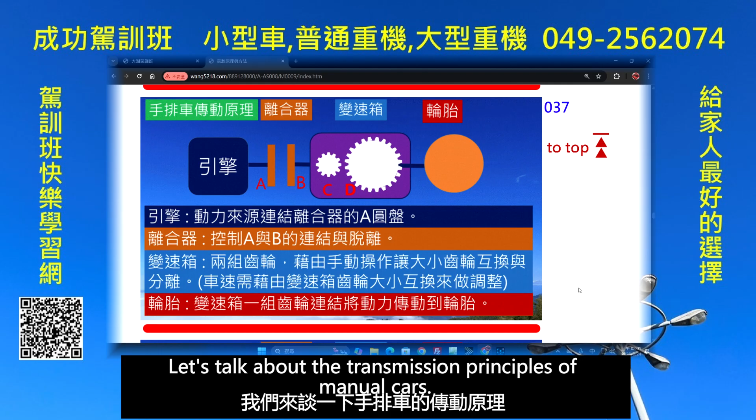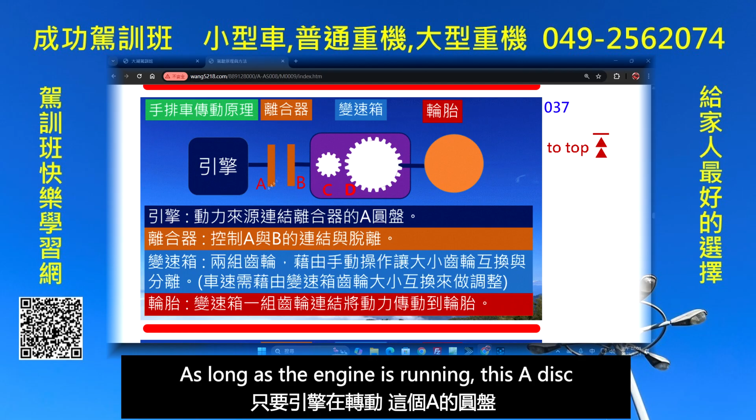Let's talk about the transmission principles of manual cars. Here we're discussing the engine. The power source connects to the A plate of the clutch. In other words, we see the engine. The clutch consists of two discs. One disc is connected to the engine. As long as the engine is running, this A disc is rotating.

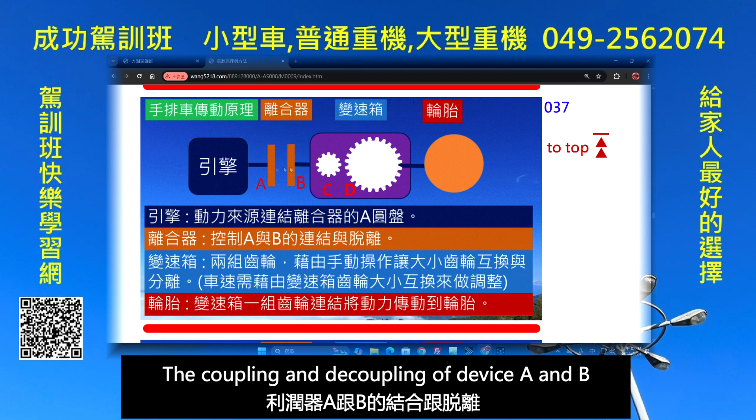The clutch part controls the connection and disconnection of A and B, the coupling and decoupling of device A and B. When we press down on the clutch, A and B separate and power isn't transmitted over. If you release the clutch, A and B connect, transferring power to C here.

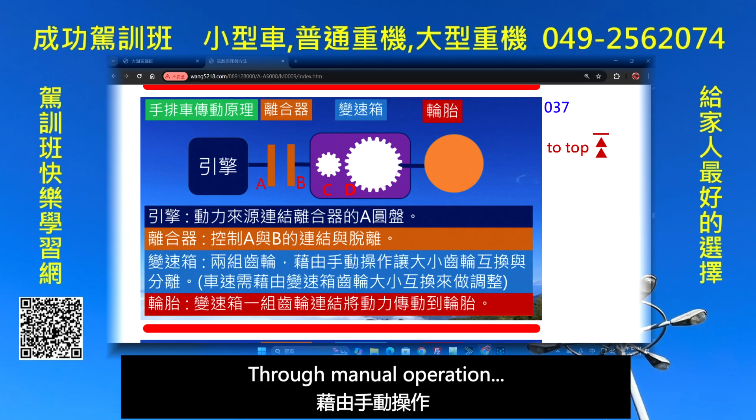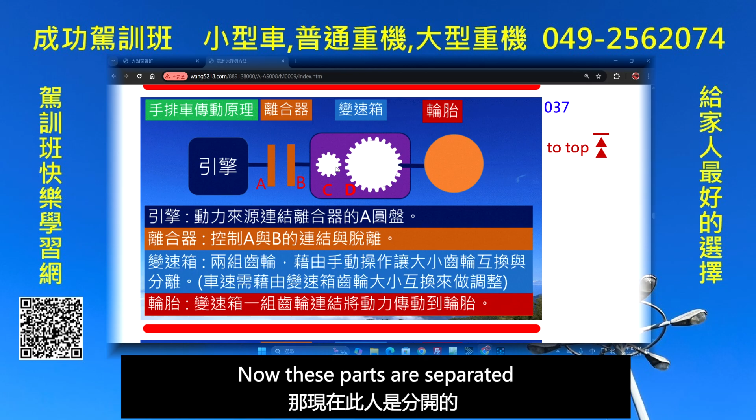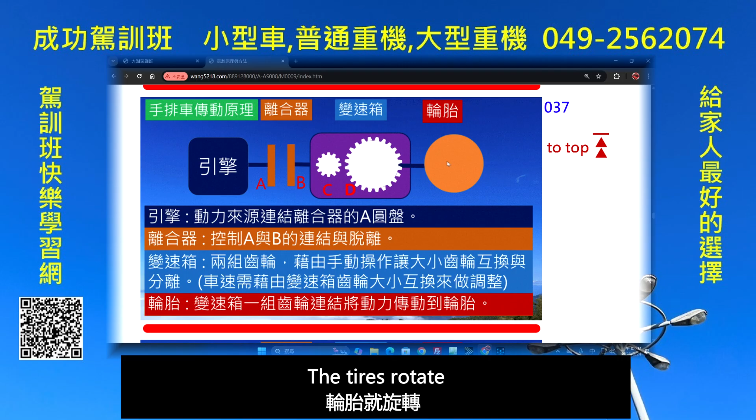First, let's understand their interaction. When we press the clutch, A and B separate. Engine, I'll start it again. Power only transfers to A here. It doesn't transfer over because it's the second device that is separated.

Second, releasing the clutch. When we release the clutch, A and B connect together, therefore power is transmitted to C, then C rotates. Think about it, everyone. At this moment, it's in neutral. Can C and D connect? It's impossible for one to be spinning while the other isn't. They can't combine. So what action do we need to take?

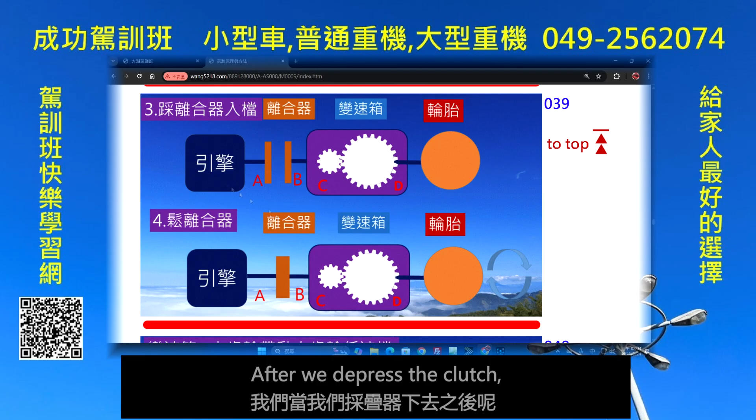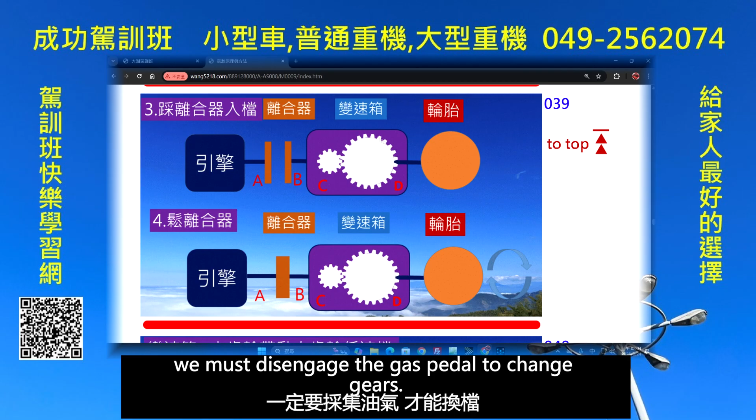That's correct, but our vehicle has weight. With the weight of the vehicle, if you want to move it quickly, it requires a lot of energy. But that's not possible. Therefore, we need to gradually release the clutch for this reason. If you release the clutch too quickly, it will stall, because suddenly the vehicle isn't moving. Hence, it stalls.

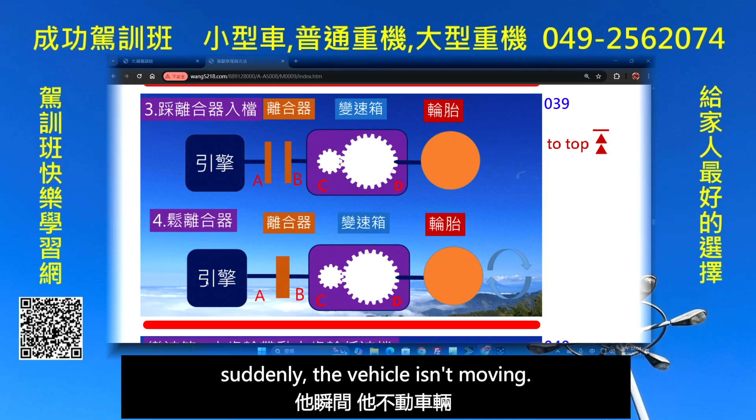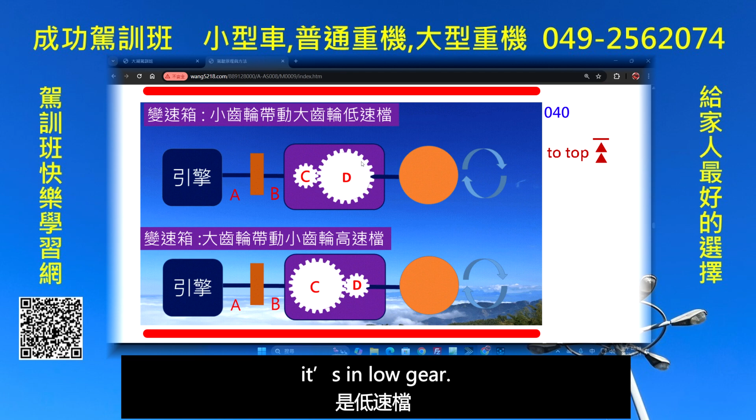Now let's look at the gearbox. The gearbox operates with the gears swapping. If we shift from small to large gear, it's in low gear. If it's large gear combined with small gear, it's high speed, because it goes faster, right? This mechanism is identical to that of a bicycle. The reverse gear is just a gear in between. With an added gear, it changes direction.

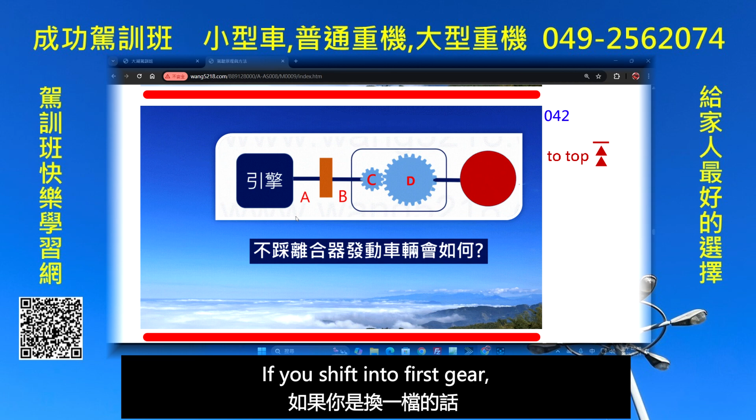Next, let's observe. What happens if you don't press the clutch? If we release the clutch, the engine isn't running, and it's still in gear. So when we start it, the vehicle will lurch forward. If you shift into first gear, it'll lurch forward. If you shift into reverse, it'll roll backward. Therefore, in a manual car, when starting, you must press the clutch, press the brakes, and ensure it's in neutral to avoid the car suddenly lunging.

So what if a manual car won't start? When there's no battery power, we can push it. Because think about it, to start, you can push the car. In other words, when we push the car, we can also start the car. But how do we start it? Shift into low gear, press the clutch. Don't press the brake, release the brake lock, push from behind. Once the car has a bit of speed, you can then let go. Releasing the clutch engages the engine to start.

In an automatic car, you can't do that, because the transmission system of an automatic car operates differently. Manual cars require pedal operation.

In this diagram, we have 1, 2, 3. Someone asked a question. Let's explain what 1, 2, and 3 signify. First, let's watch a clip.

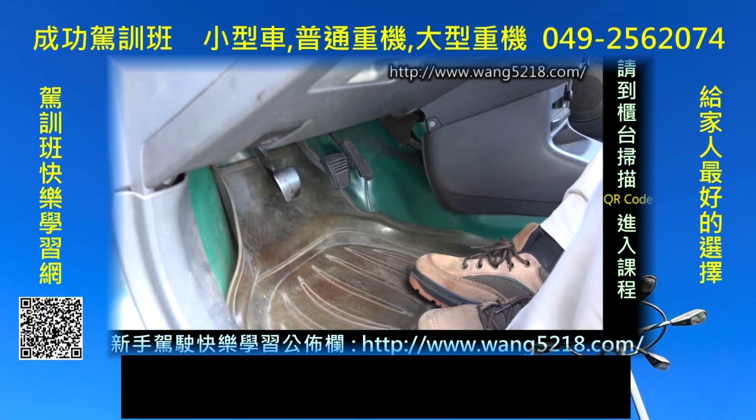Hello, everyone. This is a manual car. A manual car has 3 pedals. The rightmost is the accelerator. The middle one is the brake, and we control the accelerator and brakes with our right foot. You absolutely cannot use your left foot for the brake. It's only the right foot that operates the accelerator and brake. Okay, let's pay attention to how our foot is positioned. The foot should be on the ground. The point of contact is under our toes. Don't step like this, it's harder to control. It's just not right, this way your foot is suspended. If you can't press properly, the same goes for the accelerator. Use your toes down on the pedal. When braking, you must press lightly.

Next we introduce the clutch pedal. It's the pedal farthest to the left. When pressing it, go all the way down. When releasing, do so slowly. When starting, release slowly - each car's clutch has its own friction point, meaning the point when it starts to move the car. That point differs: some start moving with just a little release, others need to be released higher, even more so for some. This is due to different levels of clutch wear, which affects the characteristic of each car. Therefore, when releasing the clutch, the friction point varies. So sometimes when students change cars, for instance driving car A today and car B tomorrow, they find it hard to drive.

This is our handbrake section. Right now, the handbrake is in the engaged position. The handbrake is responsible for the 2 rear wheels, controlling them. For manual cars, before stopping, you must shift to neutral and engage the handbrake, then shift into first gear. Why first gear? That's the second safety measure - if in gear, the car won't move. So that's 2 safety measures, 2 safeguards. Therefore, starting a manual car requires you to press the clutch and press the brake.

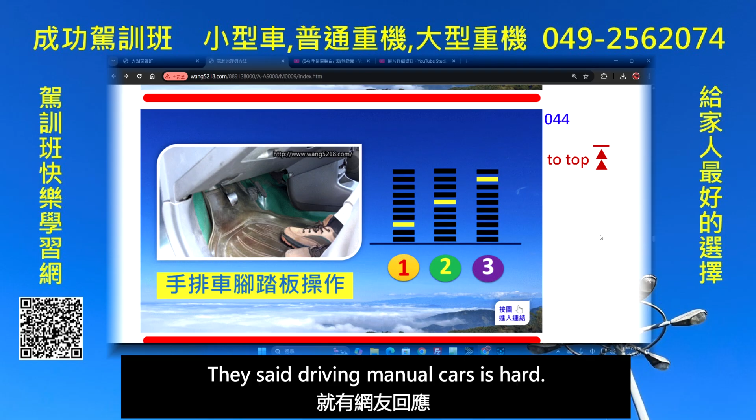This video was posted online, and some users responded saying driving manual cars is hard - they keep stalling. But manual cars are actually easy to drive and don't stall easily. Why is that? Let's analyze it.

We divide the clutch travel into 10 equal parts. The car in the driving school is car #1 - its usage is not high and the wear is also minimal. This means when you release from the start to the 3rd notch, it already starts moving the car. Let's assume another car is #2 - it needs to be released to the 6th point to start moving. So we're used to releasing quickly from 1 to 5, releasing faster in this range.

Then it stops here - release slowly. Switching to car #1, you might suddenly release to the 5th notch, jumping ahead. That leads to stalling because you jump to the 6th point - it stalls because you're releasing too fast. This teaches students something important.

The clutch in every car differs - the clutch height is not the same. What is height? It's the friction point. For example, when you release to the 3rd notch, it will pull you forward. For car #2, it must be released to the 6th point before moving, which means pulling it almost to the limit - it has to be higher because the frequency of usage differs for each car, so the wear levels differ, and hence the height will be different.

However, it can be adjusted, but once adjusted to a certain extent, it cannot be changed anymore. So when driving a manual, the first thing is to understand what clutch friction is - not every car is the same. This is something I want to remind everyone.

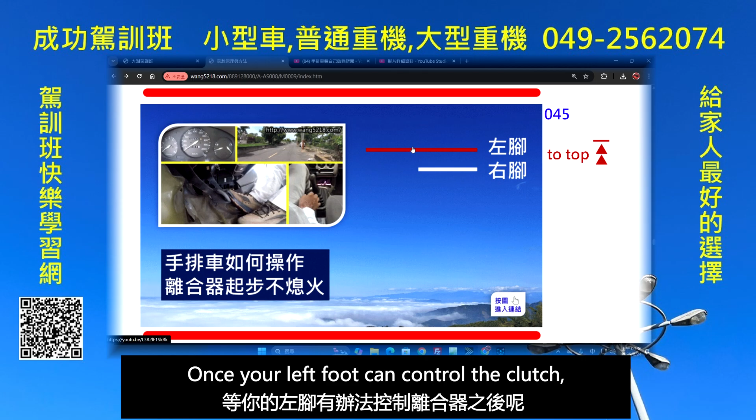Once your left foot can control the clutch, then you add your right foot. What does the right foot do? It's for gas, right? Once your left foot can control the clutch, we'll need to work with the right foot. What does the right foot do? It's the accelerator. So while we're easing off, next, we need to add a bit of fuel.

If we add a bit of fuel, the RPM will be quicker. The start will be faster and less likely to stall, because beginners are just starting out. We can't expect them to operate with both feet at once. You must practice with the left foot first, then we'll add in the right foot.

This is a step-by-step process. We can't just say, okay, use both feet to operate. That way you won't be able to operate. Just now, we already learned to control the clutch.

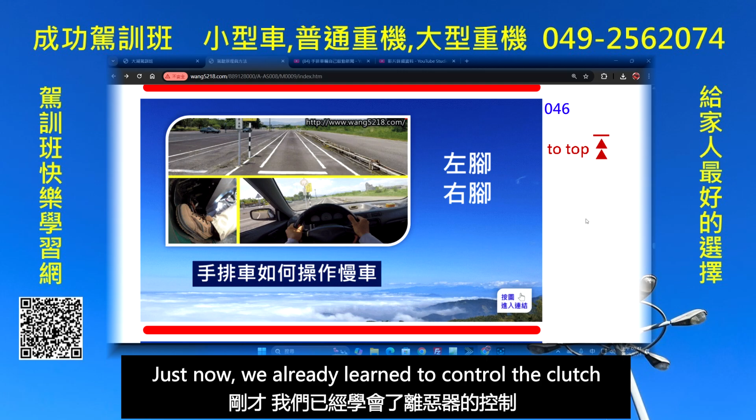Next, let's understand manual transmission vehicles, and how to control the speed of the car. The coach has written down left foot and right foot. After we finish the video, we'll explain the left foot and right foot. This is a manual transmission vehicle.

Today, we'll teach how to drive a manual transmission slowly. First, we need to press the clutch. Press it down fully and shift into first gear. Slowly release the clutch. Release until the car starts to move, then stop releasing.

We only use the clutch to control our speed. Slowly release the clutch. Release until it moves, then stop releasing. If you feel the speed is too fast, just press down a little bit more. A little slower, just press down a bit more. To go faster, just release a little bit.

Then pause with your heel on the ground. Heel on the ground. Where you turn the steering wheel, the car goes that way, then adjust left or right.

Controlling a manual vehicle at low speed, reversing is the same. We press the clutch. Press the brake, press the brake. Actually, it doesn't have braking power, so you need to press the brake. Okay, switch to reverse gear.

Slowly release the clutch, release the brake, and slowly release the clutch. Until the car moves, we won't release any more. Maintain this speed with your heel on the ground.

Now let's check our left side mirror and adjust the left side. It should be tilted to the left. After centering, adjust to the right. It's moved to the right now. You need to practice adjusting left and right.

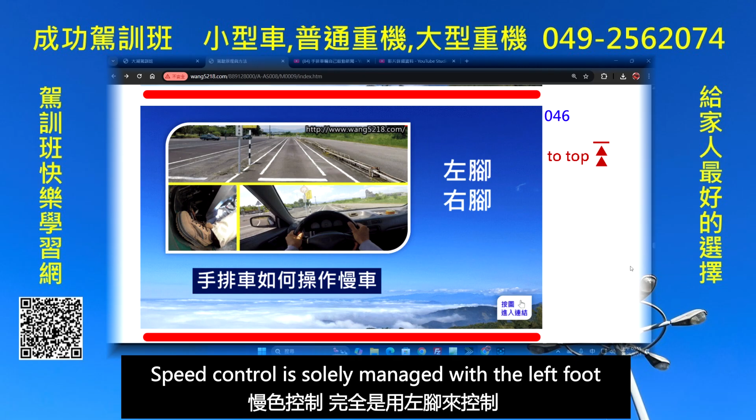So coach, why learn with the right foot? Because there was a student who released the clutch too high and the speed was faster, so they used the right foot to press the brake. In other words, they used the brake to control the speed. This is not correct. Speed control is solely managed with the left foot. The right foot shouldn't be used to control the brake. This is something to remind everyone.

Next, let's look at the manual transmission gear positions and the relationship with speed. Let's also look at the actual operation in the video. Some committee members discussed why we shift through 1, 2, 3, 4, 5. It's to synchronize with our gear shifts.

When you start, the speed is in first gear. Go a bit faster, shift to second. Each gear pushes up. Now we'll test our first gear conditions. Fix the engine RPM. At a fixed RPM, how fast can it go? What speed is it? All right, let's test it out.

We need to park. Let's start in first gear. Press a second time, press all the way down. Why do we need to press all the way down? If you don't press all the way down, you'll have issues shifting gears. It won't shift, it won't go in. It could damage the transmission. So remember this about manual cars: the pedal must be fully pressed down to shift. To be precise, shift over. Push up into first and we'll add some gas.

Slowly let off the clutch, good. And now it's moving. We're in first gear now. The engine RPM is at 2000. If the engine RPM is at 2000, the speed is about 20.

Let's shift to second gear, gently apply gas. Release the gas to shift into second. Likewise, let's keep the engine RPM. Bring it to 2000 RPM. Good, now the speed is a bit faster. It's at 25. All right, what's the engine RPM now?

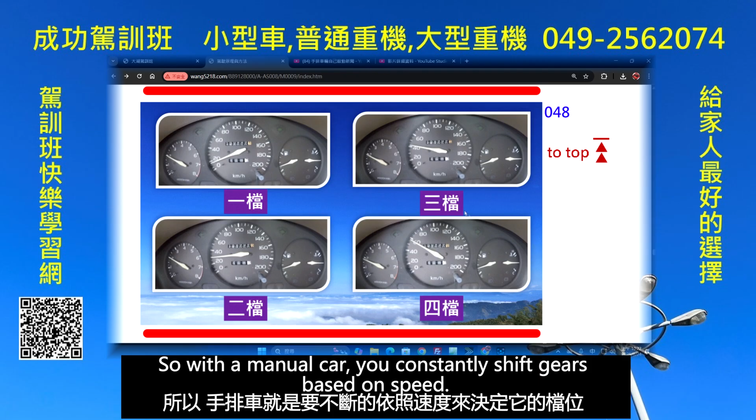Next, let's watch this video: how to shift gears in a manual car. This is a manual car without automatic transmission. How do we shift gears correctly?

Before shifting, press the clutch all the way down. Currently shift from neutral to first gear: push left, then up. When shifting to second gear, pull left and down. To shift to third gear, push up, jump back to neutral, then push up again. To shift to fourth gear, pull down to neutral, then pull down to fourth gear. When shifting to fifth gear, first push up to neutral.

Pull right, then push up. Now we're in fifth gear. It's an H-shaped design, so you must not shift diagonally.

When shifting from fifth back to neutral, slightly pull down and it will return to neutral. Don't push left or right, just push up and down. Push up for third, pull down to neutral.

Now pull down to fourth gear. Push up back to neutral. If you're unsure which gear you're in, don't push left or right, just push up and down. You can find neutral this way.

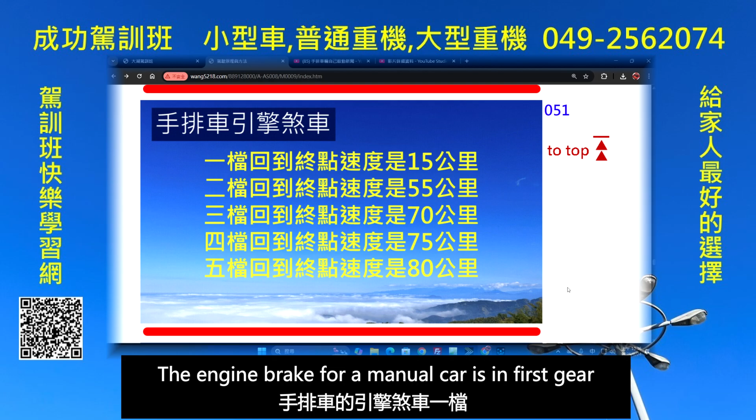The engine brake for a manual car is in first gear, the speed back to the finish line is 15. Second gear is 55, third gear is 70, fourth gear is 75, fifth gear is 80. Where do these numbers come from? Let's take a look at this video.

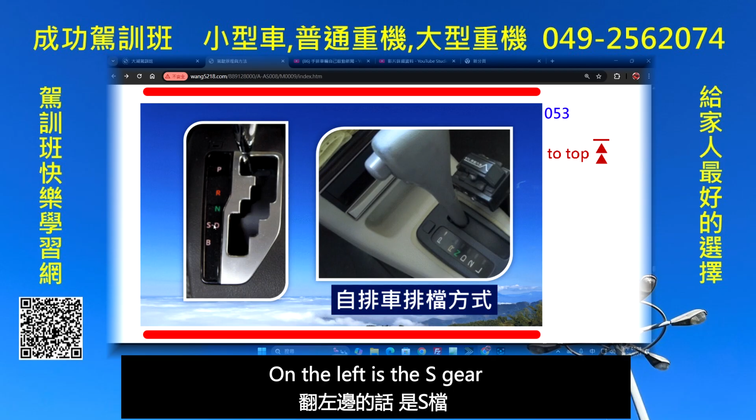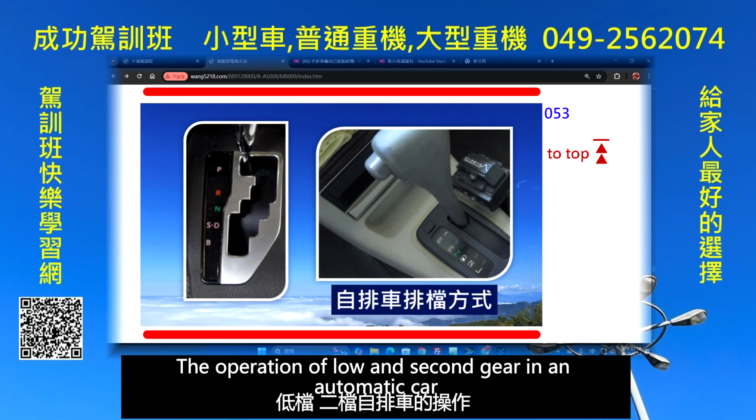This is the shifting method for automatic transmission cars. There's a P gear, reverse, neutral, and on the right is the D gear. On the left is the S gear, the very bottom is B gear. And this car is the same: P gear, reverse, neutral. The operation of low and second gear in an automatic car. Let's take a look at its gear positions.

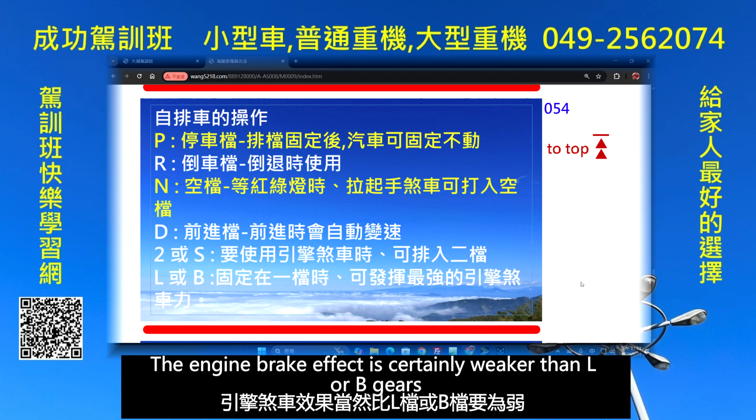When moving forward, it will automatically shift to 2 and S gears, as well as L and B gears. In principle, both of these gears have engine braking, it's just that the effect of engine braking is slower in difference between second gear and first gear. The engine brake effect is certainly weaker than L or B gears. At the same time, L gear and B gear, or 2 gear and S gear, when you are in gear, it won't shift on its own, it stays fixed in that gear.

If we're driving on the highway and need to overtake, then we need to downshift. If we're in D gear while driving, then for downshifting, you can shift to second gear. This way, the engine will raise its RPM.

Climbing hills is just the same. When we climb hills, we use D gear. If it feels weak while going uphill, then shift down to 2 gear, use S gear to climb. If you can't make it with 2 and S gears, we shift down to L and B gears because its torque is much stronger. This also means it's for climbing hills.

The way to shift gears when starting: when moving the gear shift, your right foot must develop the habit of being on the brake pedal. Normally while driving, you should also develop the habit of not pressing the shift button. What is the shift button? We'll discuss that as well. Currently, new cars have eliminated that shift lever part.

In the following video, we will also discuss: your vehicle must come to a complete stop when reversing, to shift to forward, and during forward gear it must be completely stopped, only then can we switch to reverse gear. Here we talk about the gear lever: if it's not in P gear, the car key cannot be removed.

When stopping the car, you must shift the gear lever into neutral. Next, pull the handbrake firmly. You need to switch to P gear to remove the key. To start your engine, you must hold the brake. So there's no issue there.

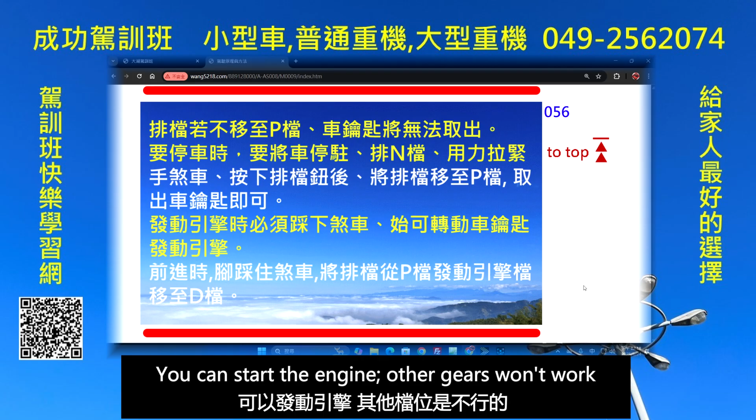To turn the key and start the engine in an automatic transmission, when starting the engine, it must be in P gear. If the gear lever is not in P, also in neutral, you can start the engine. Other gears won't work. Automatic cars have some safety designs to prevent it from surging forward. First, if you don't press the brake pedal, it won't be able to move the gear shift, and the car key cannot be removed. This also mentions preventing these situations regarding the key itself.

When shifting from P to N or D, there are still some necessary precautions to follow. Let's look at what those are.

First, when starting the engine, you must press the brake. Second, when shifting to low gear or reverse gear, you also need to press the brake, or from reverse to D, you need to step on the brake.

Third, when moving to D gear, switching from P to reverse, even if you don't press the accelerator, you can use coasting to slowly move forward. When you need to stop, you must press the brake. In case of a gear shift, an incorrect operation can cause the car to lurch forward, or when reversing, it's the most basic action. Of course, you can press the brake. If there's a gear shift opportunity, you may switch to neutral to cut the power.

Let's look at this automatic car. It has a release button for shifting. You have to press the release button. Okay, now let's switch to D gear.

So to shift from reverse to neutral, you don't need to press. You can just move it out without pressing. Shifting from neutral to low gear also doesn't require pressing. And pushing to neutral again doesn't require pressing. So neutral, low gear, neutral doesn't require pressing.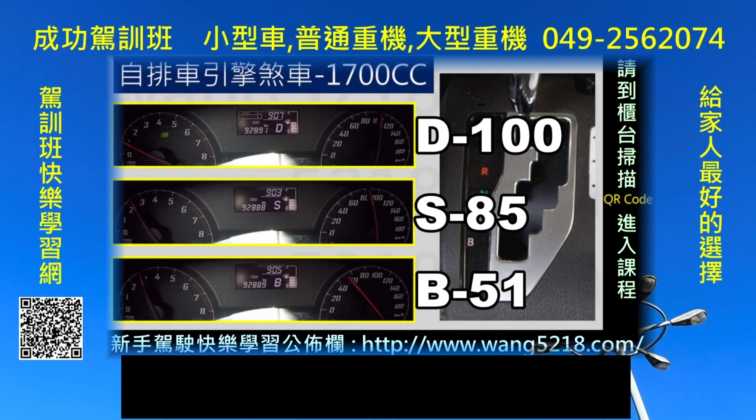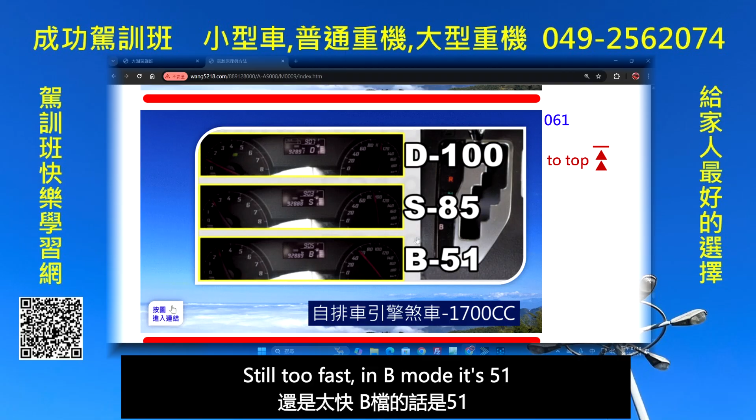The test results for this car: in D gear, the endpoint is 100. B gear is 51. When going downhill, use B gear to descend. Safer, because in S mode it's still 85, still too fast. In B mode, it's 51.

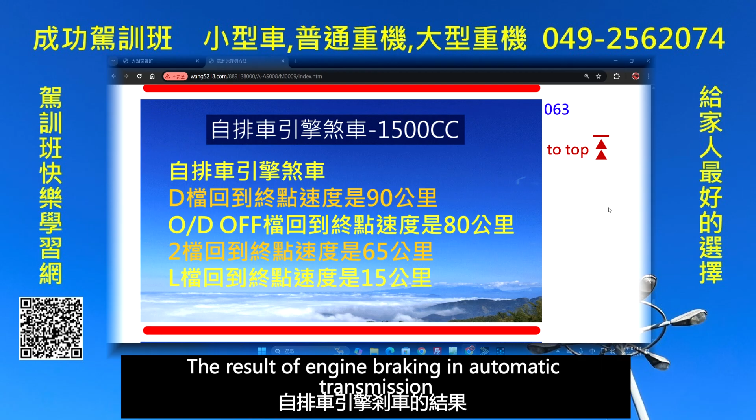This is the result of his test. The result of engine braking in automatic transmission, because this car is 1500 cc. In D gear, the endpoint is 90. When O/D mode is turned off, arriving at the endpoint is 80. In second gear, it goes back to 65. For L gear, it's 15. So for this car, when we go downhill, we use second gear to descend.

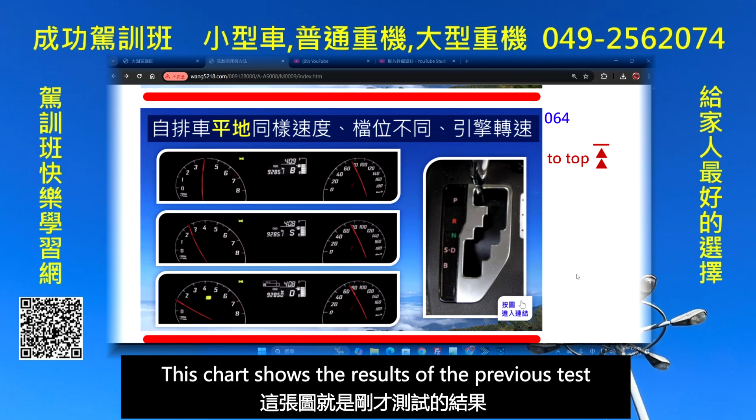This chart shows the results of the previous test: the automatic car at the same speed on flat ground with different gear levels. Engine RPM is different depending on the mode. Let's first look at B mode.

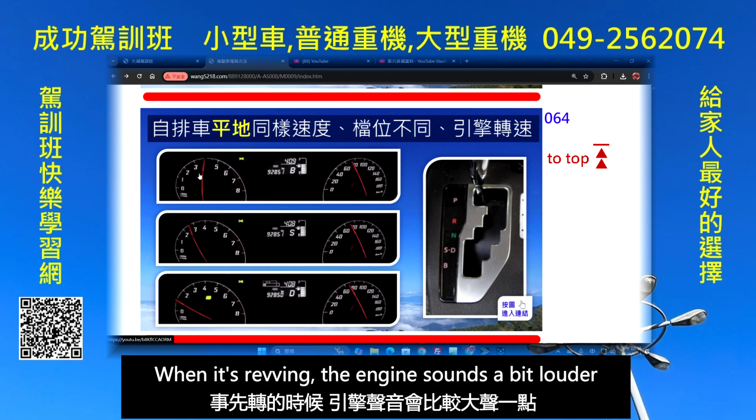In B mode, at a speed of 70, the engine RPM reaches 4,000. When it's revving that high, the engine sounds louder, because the fast RPM produces more noise.

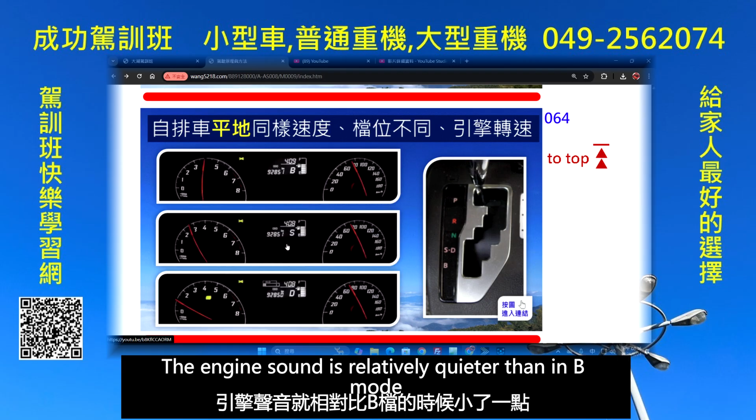In S mode, the speed is the same, reaching 70, but the RPM gauge only hits 2,500, so the engine sound is relatively quieter than in B mode. In D gear, it's the same speed of 70, but it only needs 1,000 RPM, so the sound is relatively lower.

In D gear, it will shift by itself—starting in first gear, once speed picks up it will shift up. In S mode it won't jump gears, and B mode also doesn't jump. So this is where the difference between the gear levels lies.

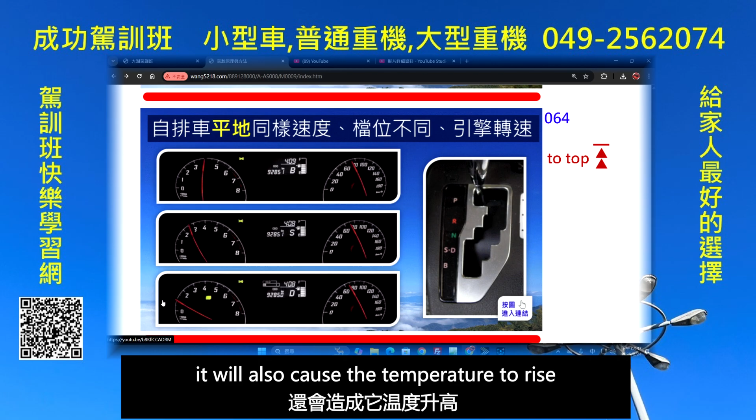While driving, if the engine noise feels loud, you need to pay attention to whether your gear is right. You might be in S mode, but S mode isn't off limits—it can be used, it's just that the RPM is higher, so the sound level will be louder. High RPM and loud noise will also cause the temperature to rise, so this is something to remind everyone about.

This is the eco driving indicator light. When this light is on, it means you're in eco driving mode. But if you press the gas pedal hard, the light will go off. Let's talk about how to drive economically.

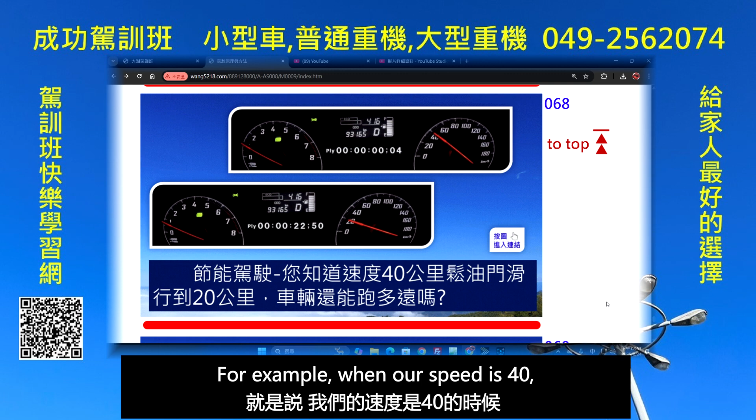For example, when our speed is 40, release the gas pedal and coast, and see how far the vehicle can go down to 20, to gauge how far it can coast. Now let's watch this video.

Currently the speed is 40. Now releasing the pedal, it's coasting. The number above is 100 meters—110 meters, based on the lane markings used to gauge the distance. This is just an estimate.

Okay, we are now at 20. At 20, it means the speed is very slow—this is the moment we just press the brake. So when it drops from 40 to 20, it took 22 seconds and a total of 160 meters.

This tells us we need to keep our eyes on the road ahead, release the gas pedal early to decelerate, and coast slowly down to a speed of 20, then gently tap the brakes to stop. If you're braking hard, it means you accelerated too much. When driving outside, keep your eyes ahead, release the gas pedal early, let it coast, and stop when necessary.

Don't accelerate and then brake hard—that's dangerous and also increases brake wear. So remember: keep your eyes ahead, release the gas pedal early, and let it coast until you need to stop. This is what's called eco-driving.

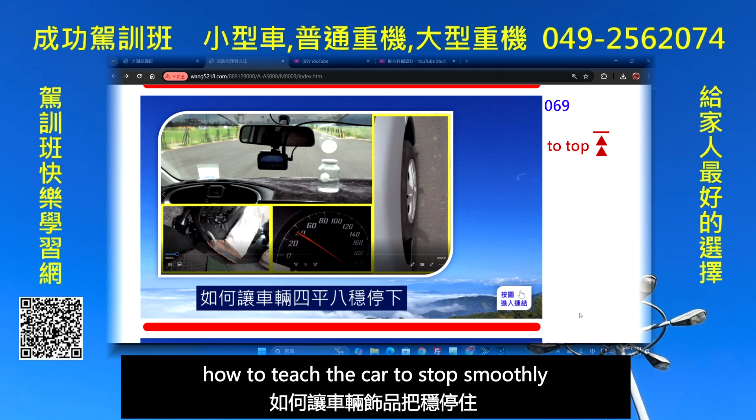Next, let's look at how to teach the car to stop smoothly. When practicing in driving school, it's important to get the car to stop smoothly without slamming the brakes. The instructor ends up swaying back and forth otherwise.

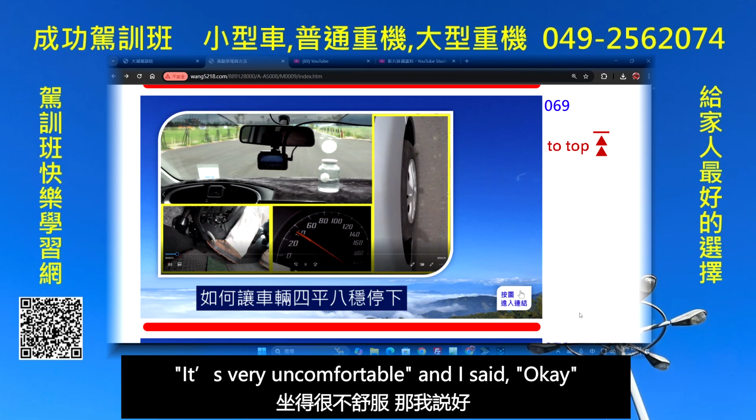Once we met a student—that wasn't my teaching, it was another colleague's. He came to me and said, 'Wow, this is so hard to teach. Every time I brake, I slam the brakes, it's very uncomfortable.' And I said, 'Okay, I'll go take a look at what's going on.' First I asked him, 'Why do you want to learn manual transmission?'

He was already in his 60s and wanted to learn manual because he was going to immigrate to Switzerland, since his daughter lives there, after he retires. I said, 'Okay.' Next I asked about his profession—he's a professor. I asked what he teaches, and he said he teaches piano. I said, 'Great.'

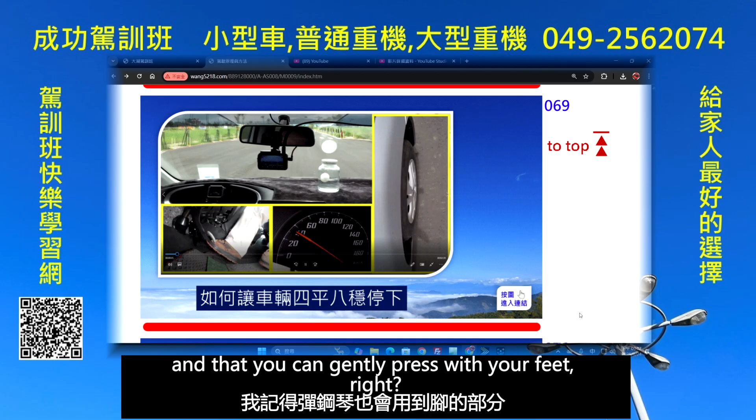Then I asked him, 'I remember playing the piano also involves using your feet, and you can gently press with your feet, right? Just like playing the piano, you can gently tap the brakes, not press too hard.' He was afraid he couldn't control the car—don't press it that hard, because he was scared of losing control.

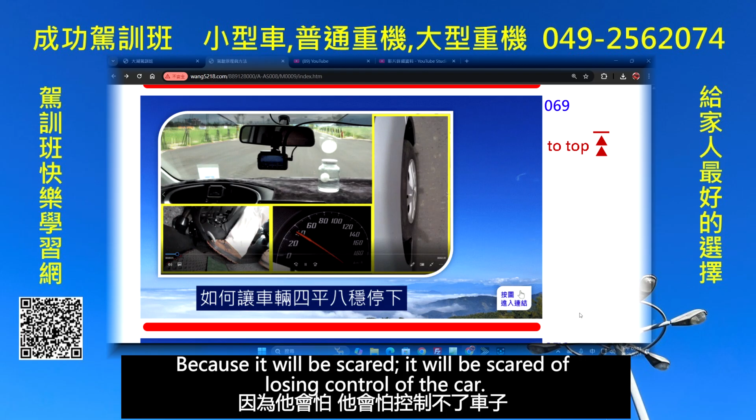So when he stepped on the brakes, he really pushed down hard, which made the instructor uncomfortable. So later I told him, it's like playing the piano—just gently and slowly press down, and that solved it.

We need to stop at the intersection ahead. Let's release the gas. Lightly step on the brakes, do it slowly—just lightly press, no need to apply too much force. Press slowly, look at that ball.

We're at the entrance, lightly press down just a little. Then release it, just like that.

Lightly press, step on slowly. Release a little bit, right? Like this.

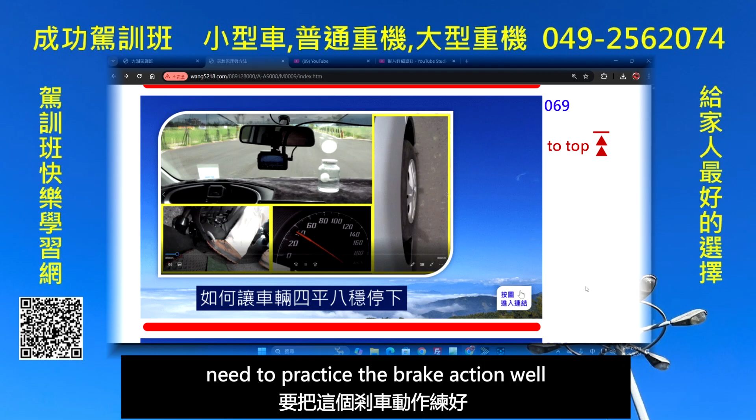This means that all of you students at the training class need to practice the brake action well. Otherwise, when you drive out, no one will dare to ride in your car. This is something to remind everyone about.